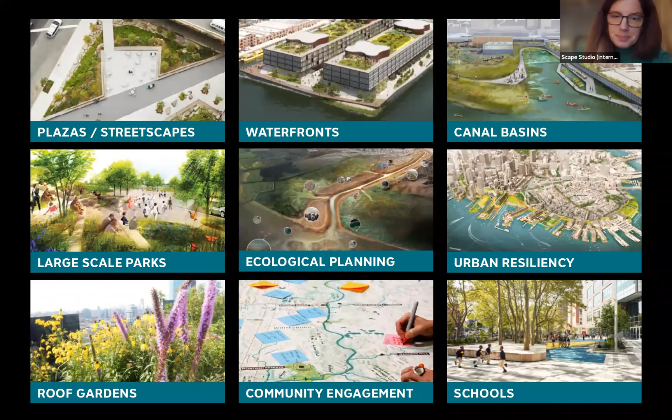At SCAPE, we work and advance a variety of projects at different scales, as I mentioned. We definitely have expertise and strong interest in urban shorelines and waterfront landscapes. We do ecological planning. Community engagement is really core to our practice, and we try to bring elements of it into all of our projects. We also work at the scale of the pocket park, the school, or the plaza, as well as the scale of large scale parks and regional work. So quite a variety of project types.

We bring certain core principles to all of our projects. One is a focus on reviving landscape systems. Nadia mentioned her work in Lexington, Kentucky. These are some images from Lexington looking at a naturally occurring landscape system on the right, these karst pools and emergent moments that interact with limestone bedrock as part of the hydrology of the greater bluegrass region.

On the left is what happens when you try to cover that up and channelize it and turn it into a hidden piece of urban infrastructure: those landscape systems still exist and they emerge sometimes in unfortunate ways, like this overflowing manhole. So a lot of our work is about trying to restore, reveal, and revive landscape systems which have been ignored, improperly designed, or neglected over past generations.

We also think a lot, and I'll talk about this this afternoon, about forging connections between humans and non-humans. On the screen here are two residents of New York City. On the right, a human volunteer dressed up as a horseshoe crab for a festival in Raritan Bay around our Living Breakwaters project, which I'll speak to this afternoon. On the left is another resident of New York City, in Plum Beach. These are horseshoe crabs mating on the shoreline with the new and full moons in the summer months.

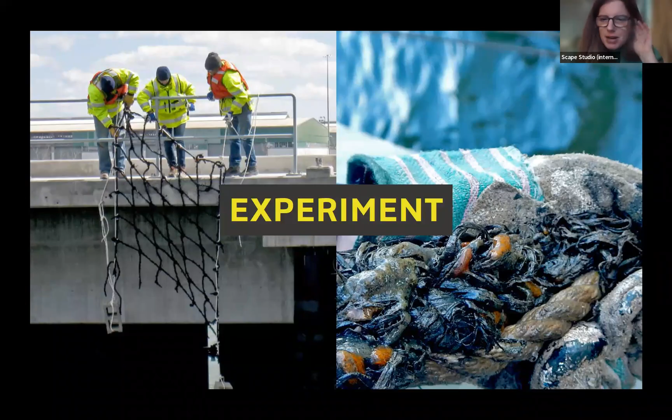Experimentation, I think, is really important for us. We don't always know the results of the landscapes that we're creating. Thinking about working with scientific professionals, in the case of the fuzzy rope weaving evening and the habitat panels you see on the left, we worked with some local scientists at Brooklyn College to study the marine life that grew on these fuzzy rope panels over time. But we pursue projects sometimes simply to learn from them and to apply them to other work, so developing experiments within your larger scale design projects is something we find very important.

So those are some larger framing principles that we bring to all of our projects. I thought this afternoon to talk about urban shorelines and focus on two projects that really relate to climate adaptation and resilient design. These projects are both urban shorelines, but they're quite different.

Urban shorelines are highly contested spaces, often with many different battling and competing interests. For example, horseshoe crab nesting versus beach use versus urbanization are often in conflict with one another. There are also sites that are changing rapidly, either from an urban perspective, like densifying or new development occurring, or from climate change impacts — eroding, suffering from repeat flooding, wave action, or land loss.

And finally, each of these sites has different but unique ecological potential — they have a past ecological history that's been somewhat covered up, which we have tried to reveal or revive within our work.

The two projects I'll feature: one is called Living Breakwaters, a project in Staten Island. At this point it's a very long project — I've been working on it for a very long time, it's been in our office for a very long time, and many different generations of SCAPE have advanced and contributed to this project over its different legacies. The other is a project we've probably had now for 4 or 5 years in the office, work around the Gowanus Canal in Brooklyn with a variety of clients. Both of these are New York City projects, but I do hope that some of the lessons here are applicable to some of your work more internationally.

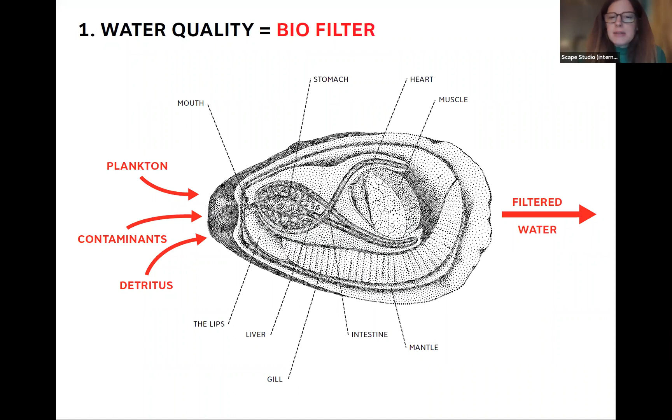This was one of the takeaways from this greater Oyster-tecture research, and it seems like a basic takeaway for this audience, but I think it's important to share that we really need to be thinking about the needs of non-humans in our design of cities. Whether you're a developer building a bulkhead wall, or a parks agency maintaining a shoreline, we should be thinking about operations, maintenance, and design in relation to species that are not just people. This work is about bettering the world for people, but also bettering the world for oysters.

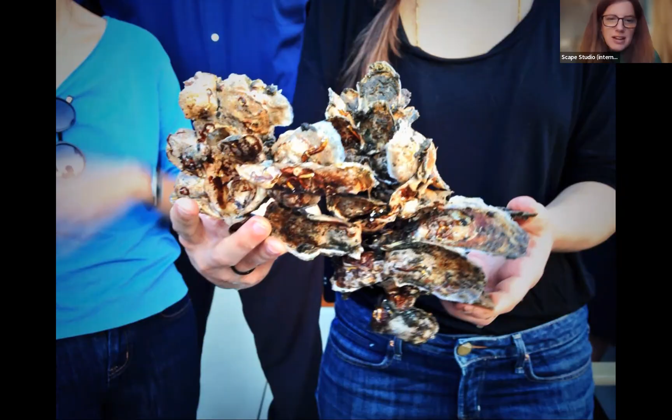This is one of those views of those amazing amalgamated reef structures emerging from this restoration project. To really think about how you design for non-humans, you need to consider the life cycle needs of non-human species.

In this proposal for the Museum of Modern Art, which we titled Oyster-tecture, we did a whole process of mapping out and trying to understand the life cycle of the typical urban oyster. Oysters start as a sperm and an egg, and turn into a fertilized egg for about a 2 or 3 week period. This little oyster larva, called a spat, is free floating within the harbor, and gets pushed around by the waves wherever the currents take it. After that 2 week period, it attaches to something.

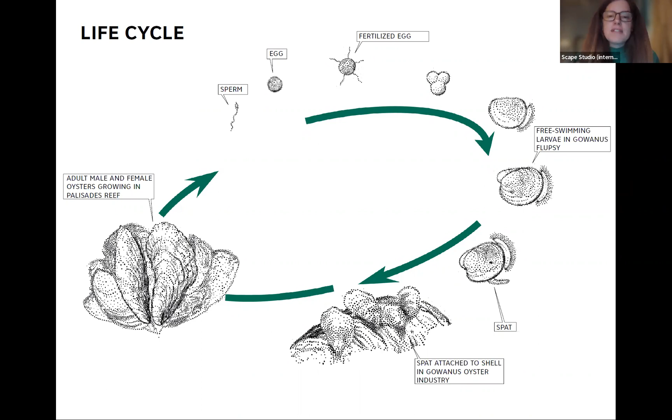Typically it attaches to a material that secretes calcium carbonate—they're slightly attracted to that. They don't have much ability to move themselves, but if pushed by a wave or current into a little eddy or slow moment where there's a material that secretes calcium carbonate, they will attach to those surfaces. Oyster shells are one of those materials. That's why you get these reef structures of oysters building on oysters, because they're slightly attracted to one another. The spat attaches to an existing oyster shell, turns into a baby oyster, and grows over time into this larger scale reef system. That's how the oyster life cycle occurs.

We thought about this in our proposal for the Museum of Modern Art, which was focused around—this was all before Hurricane Sandy hit New York City, this was around 2009. This exhibition was asking different teams of architects and designers to envision how New York City shorelines might react or adapt to future hurricane and storm threats. It was all very hypothetical at that moment.

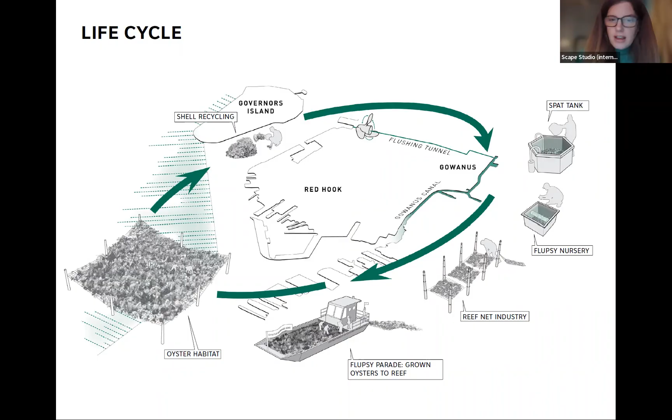We developed this hypothetical proposal that focused on the Bay Ridge Flats, where I showed that original picture of the restoration pilot reef happening—how there could be a whole cycle of restoring, cultivating, growing, and farming oysters within the Gowanus Canal after a cleanup process, then paraded out to this flats area and turned into a very large scale oyster reef that would help protect this neighborhood from storm surge and wave action with future hurricanes.

So this is an image of that kind of seed of an idea in a museum—again, very hypothetical, but it really helped us set up important partnerships with organizations like New York New Jersey Baykeeper, the New York Harbor School, and others, thinking about how this could actually occur, and how experimental science on the ground could inform a larger scale design proposal.

So we made a model thinking about this net-like material being the substrate for the oyster, and how that could be deployed out in the harbor here in the distance as this large scale living reef and blue park—something that could attract people, be an ecological resource, and also help buffer the shoreline.

Sandy happened a couple of years later. So while this was a project, sorry, a couple of these images are very low res—I think something's happening with my screen, but I think it'll be okay.

A lot of the conversations around this project were interesting and curious, but after Hurricane Sandy there was a real renewed interest in pretty innovative thinking around shoreline resilience concepts—not simply trying to build back what had previously existed before the storm, which was devastating and caused loss of life in so many urban shoreline neighborhoods, both from wave action, from surge, and from all the other associated impacts to our energy system, food system, and healthcare system that happened around the storm.

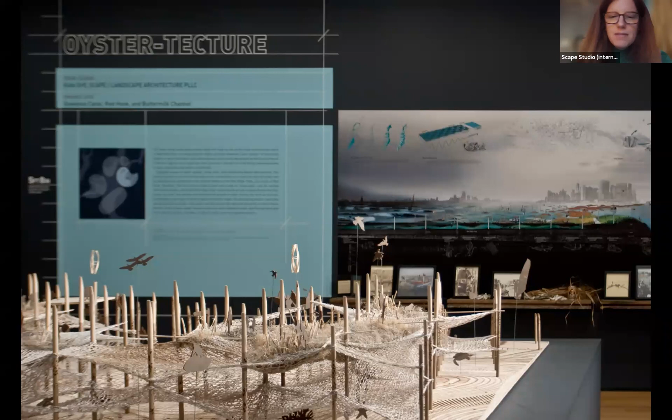Because of the lessons we had learned from Living Breakwaters, from Oyster-tecture, this museum proposal, some of the scientific partnerships and school partnerships we had fostered, and some of the engineering lessons we had learned, we developed this proposal.

It was with a highly collaborative team—many different partners were involved here. And ultimately, the project was awarded funding for implementation.

$60 million of funding was provided by the Governor's Office of Storm Recovery through HUD money. The Governor's Office of Storm Recovery at the state level is the client for this project as it is moved into implementation.

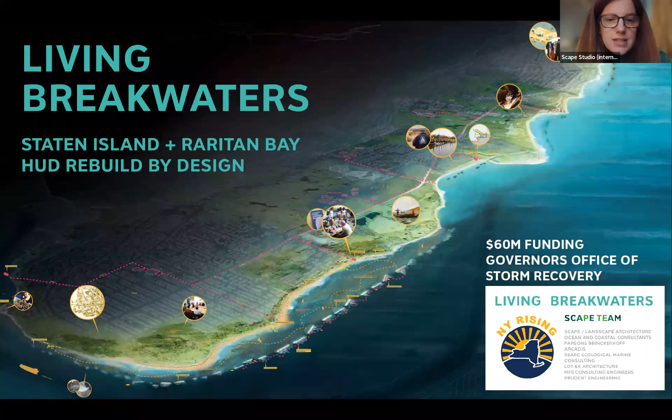But I'll talk a little bit about the genesis of this project and some of the competition work, and then talk about how it's really landed into the world of implementation and construction. Now we're finally in construction on this project, so that's a big accomplishment.

As I mentioned, this project is really about combining typical notions of risk reduction—trying to reduce whether it's surge or wave impacts to the shoreline—with cultural resilience and ecological resilience, and thinking about them all together equally. To start our process of research and site analysis, it was a really innovative competition because it did have a whole research phase.

It wasn't like a typical RFP that kind of tells you what the solution is in the request for proposals. This allowed for an open-ended design process to drive proposals, and I think that's why so many innovative proposals came out of it, versus a kind of repeat of the type of infrastructure that we see in places like New Orleans, levee landscapes.

So we focused in our research on bay landscapes and shallow water landscapes, because we had learned with our work on Living Breakwaters, on Oyster-tecture in the museum exhibition, that we could significantly reduce wave action with elements like oyster reefs where there was shallow water—and in deep water this was much less feasible.

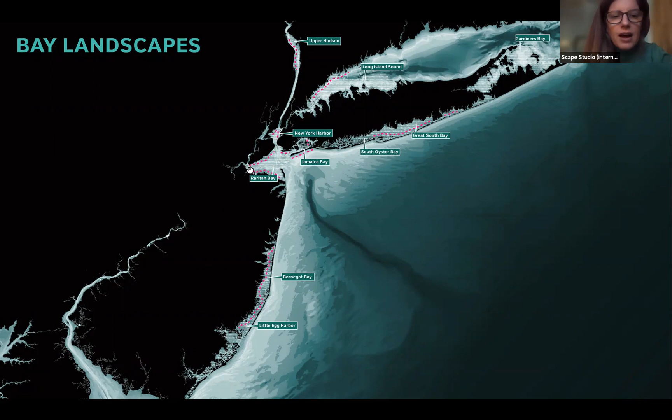Raritan Bay as a site really rose to the top because it experienced this extreme level of wave action that actually increased the height of the surge in that neighborhood and pushed houses off their foundations, and very sadly caused loss of life in that area, and had a very shallow water landscape. This became one of our focus sites of interest, and shallow water landscapes for us are a real mosaic of landscape types.

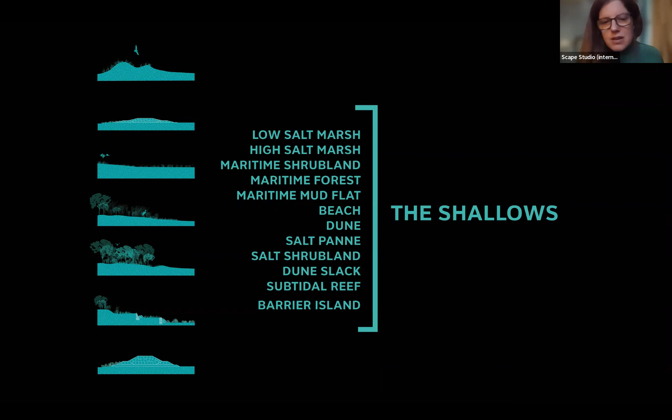So we began to learn more about this cross section of ecosystems that combines to make the shallows, and thought about a proposal for these sites that was not focused around one piece of singular infrastructure, like a levee that cuts off the relationship between land and water, but thought more about a layered approach of tiered wetlands, upland modifications like vertical elevations of building and higher ground development, combined with offshore interventions like marsh restoration, oyster reef creation, or breakwater creation.

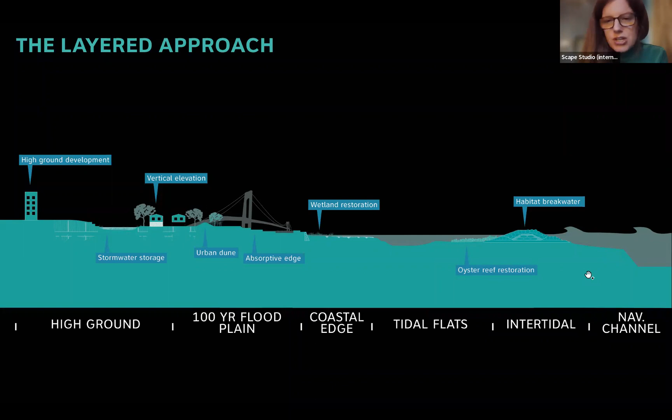That layered, dispersed system enabled more interaction and engagement and a culture of resiliency to develop around the waterfront. People live in many of these waterfront neighborhoods because they love the relationship to the shore, whether it's the view of the open ocean, the beach, or the marsh. These ecosystems are core to people's cultural identities, so we wanted to develop a project that would enhance that rather than cut people off from the water.

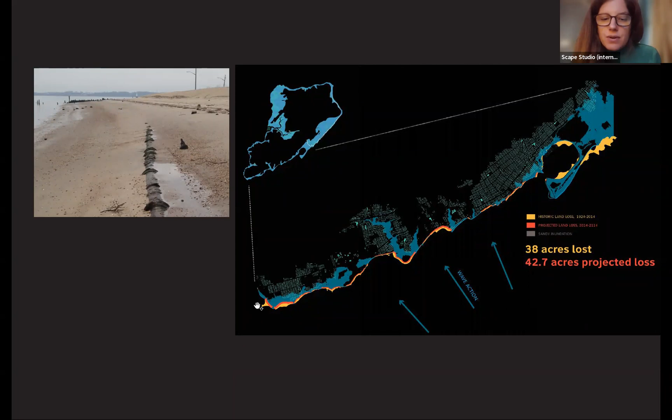We also began to project forward future land loss, which became very important for our calculations—if nothing happened here, what type or scale of erosion in red might we see in the future? This led us to focus on this portion of the shoreline as a site highly susceptible to future land loss over time.

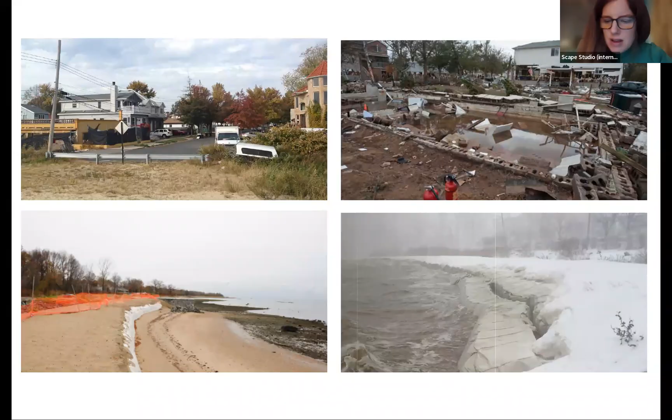So we focused on this infrastructure of breakwaters, a typical risk reduction engineering technique to reduce wave action in this neighborhood. We looked at submergent and emergent breakwaters, below and above the high water mark, and were very interested because it reduces the scale and intensity of the surge, reduces the physical force of the waves, breaks that wave action down, and creates slower, safer water. But it doesn't cut off the water completely—there will still be flooding if you add breakwaters, just less intense and less severe. It maintains that level of ecological interaction and water flow that shorelines need.

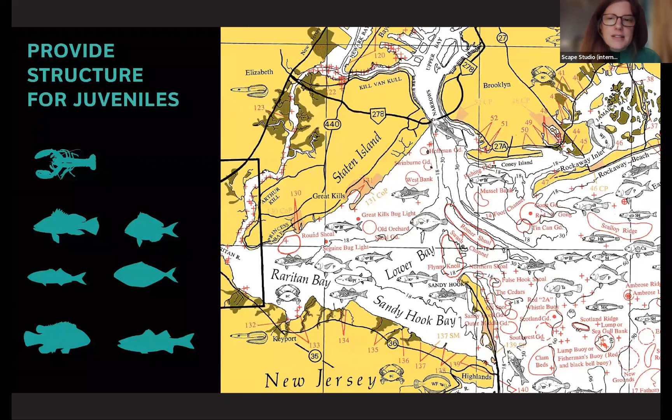One of the things we found with this project was that we had the opportunity within Raritan Bay specifically, because of where it falls regionally within our harbor and river systems, juvenile fish were really using Raritan Bay. Striped bass or tautog or other fish species are good examples of this, but there are many fish species.

Many fish species like structure, and the breakwaters can provide physical structure in the water, like little pores and nooks and crannies. For structure-loving fish, many of them are large as adults, maybe 2 feet, 3 feet, sometimes 4 feet or larger, and they swim up and down the East Coast. They have these huge home ranges, but they often return to their home rivers to spawn.

In this case, they swim up the Hudson and lay their eggs far upstate. Those little baby fish use the Hudson as a nursery for about a year, then move to Raritan Bay, where they hang out for another year or so before they're big enough to become ocean adults and survive the large predators out in the ocean.

This is one of those lessons around not just saying I'm going to design for a fish, but thinking about what types of fish and what phase in the life cycle your site and project can really accommodate. So we began to focus very much on designing for structure-loving juvenile fish within Raritan Bay.

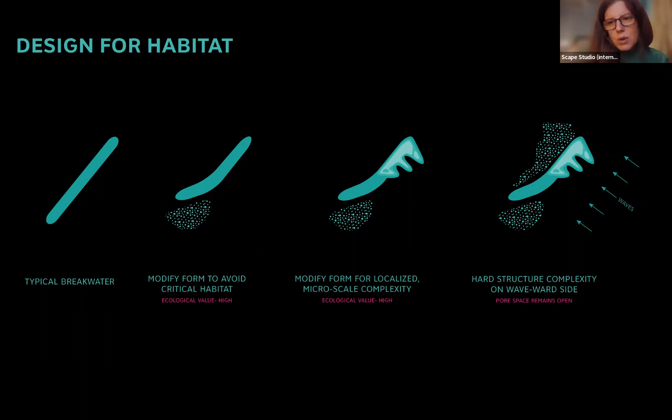That was the effort to create localized, more micro scale complexity. We oriented that complexity on the waveward side, so we're not creating a lot of complexity on the side where sediment is settling out and accumulating, because that fills up all those little holes in the structural diversity. On the waveward side, the waves wash out those holes more frequently, and that structural complexity is preserved.

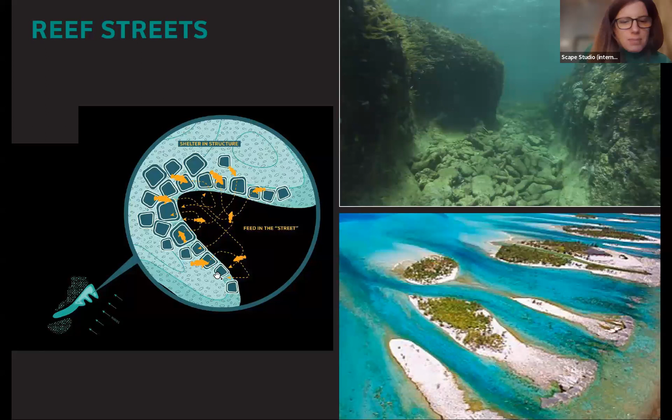These elements, these little fingers that extend, we call reef fingers and reef streets, where small juvenile fish can hide in the breakwater structure in these finger-like protrusions, modeled off of local and international reef systems. They dart out and feed in the open water of the street, then dart back in and find protection and shelter within the reef fingers.

We also worked with ECOncrete to think about alternative types of materials. We're using stone in the breakwaters as a core material, but supplementing it with an ecological underwater concrete that has a chemical and compositional mix better for habitat recruitment underwater. It's also engineered to perform like maritime concrete, a much more robust spec than typical concrete.

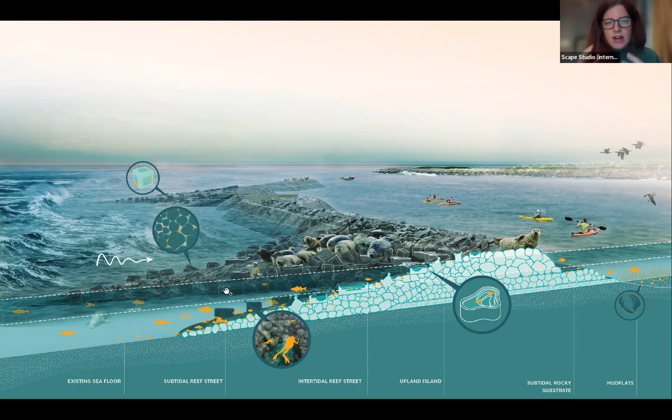Here's that image again of this system all coming together: these more linear breakwaters with emergent tops that can provide habitat for harbor seals, which are returning to New York Harbor, plus underwater reef fingers on the waveward side, incorporating e-concrete tide pools and breakwater units, as well as different scales of stone to create micro complexity below grade.

These were called the Great Beds, and they were actually artificially expanded by oyster farmers over time to be larger than the original oyster reef and cultivated - a whole farming economy happened underwater here. These maps show that evolution, the original tonging or collecting of oysters within the Great Beds, one at Ward Point, one at Round Shoal.

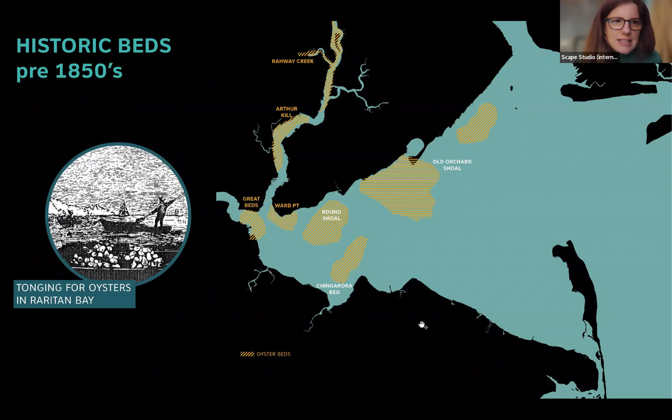It's interesting when you look at the historic navigation channels still in use today - they have this funky little swoop because they were originally designed to avoid the oyster beds. The beds ultimately died, sadly. You can see how that navigation channel emerged in this era and moved around the oyster beds.

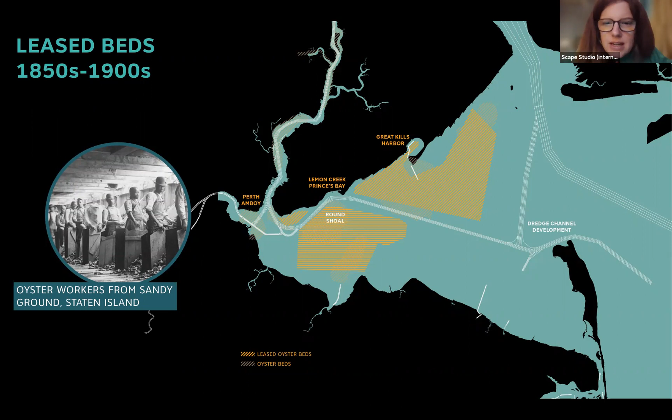But you can also see how these existing oyster beds were artificially expanded as part of oyster leasing. This is an image of oyster workers from Sandy Ground at the height of the oyster economy. But sadly, both the economy around oysters and the natural system of the oyster reefs disappeared around the 1900s-1920s because of dredging, increased sediment in the water which suffocated the oysters, overharvesting, and disease - many combined reasons, mostly tying back to urbanization.

We were inspired by this history. In addition to thinking about the physical structure of the inanimate objects we're inserting into the harbor, like the e-concrete and the stone, we're also trying to foster this living layer of oysters over time on this project. This has been very much in collaboration with a partner called the New York Harbor School, a school system - high school and now middle school - that focuses their entire curriculum around engagement with the harbor.

They have a project called the Billion Oyster Project, which emerged after this competition effort to restore 1 billion oysters to New York Harbor, and they are a very important partner on Living Breakwaters. We worked with them to identify a variety of ways that oysters could be restored back to the breakwaters.

The systems we've incorporated in the construction set include oyster gabions that move around the edges, and different concrete units that have spat on shell and spat on disc inserted into them. They're kind of like starter kits for oyster reefs that will grow and agglomerate over time.

We also need to monitor the oyster beds and the breakwaters with cameras, to ensure that no one is illegally harvesting oysters, because you cannot eat the oysters in New York Harbor—the water quality is not at that level.

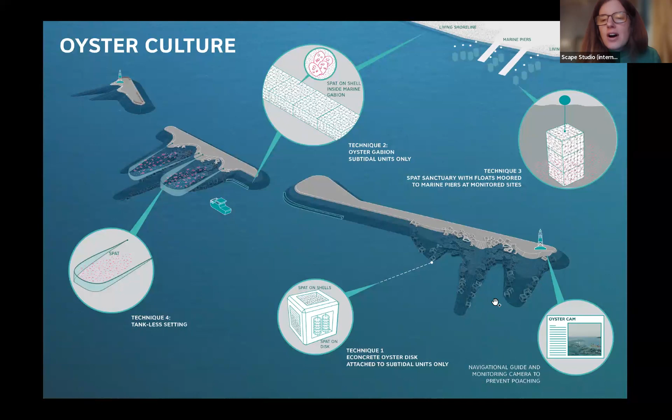I think a part of this is also really about how people are a critical piece of urban ecology. This project is designed to help reduce risk to these coastal communities, but it's also designed to engage people. We thought about engaging the younger generation in this work, and identified a whole range of schools close to the waterfront that could be involved in the creation and stewardship of this project over time.

Our graphic design partners at MTWTF developed an oyster gardening manual for the New York Harbor School that they use to help teachers teach oyster curriculum in their class. We actually had a group of harbor school students come out and work with Staten Island educators to think about how they could bring their schools to the shoreline and engage with this project over time.

This work is all about trying to design to enable positive change. The Living Breakwaters project is not a replica of a natural system that once existed—it's inspired by that, but it's a whole new thing, a whole new type of shoreline infrastructure being proposed. It acknowledges that we can resuscitate some of that historic life that was once here, but it's going to take a whole different form if it's also going to provide this role of coastal protection in this community.

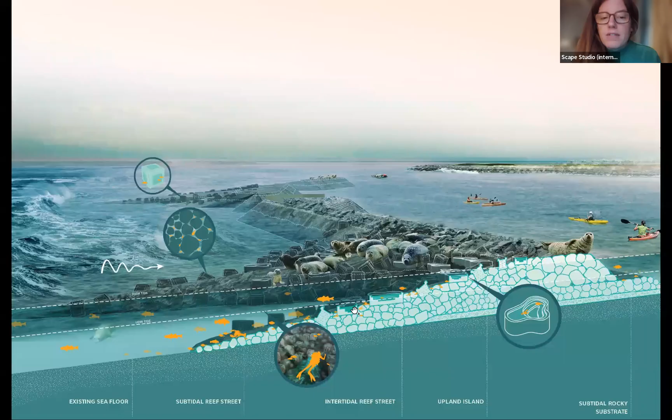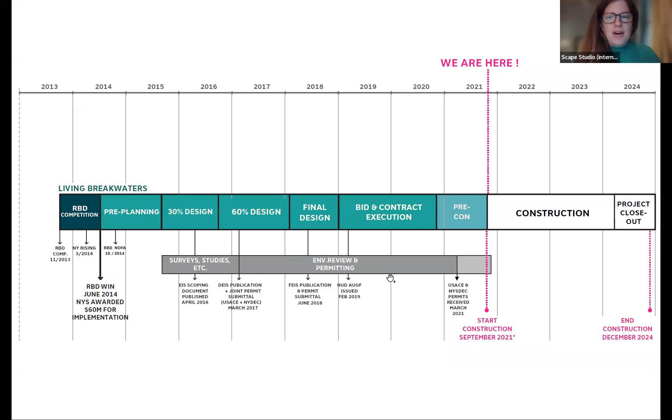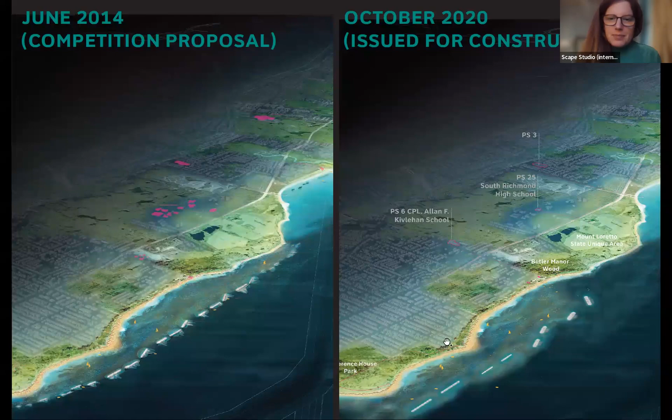I find this slide funny because we have our June 2014 competition proposal bird's eye view here on the left—this necklace of breakwaters that helps create this protected shoreline and enhanced shallow water habitat. And this is the document set from October 2020 issued for construction, the actual configuration of breakwaters that does these things. So in 2014 this was a concept, and in 2020 this is a fully modeled, both physical model and hydrodynamic model, engineered solution. If you squint your eyes they look quite similar, but when you look at the details, they're very different designs. I'll talk briefly about some of the design process of going from the competition design to the reality of what's being constructed.

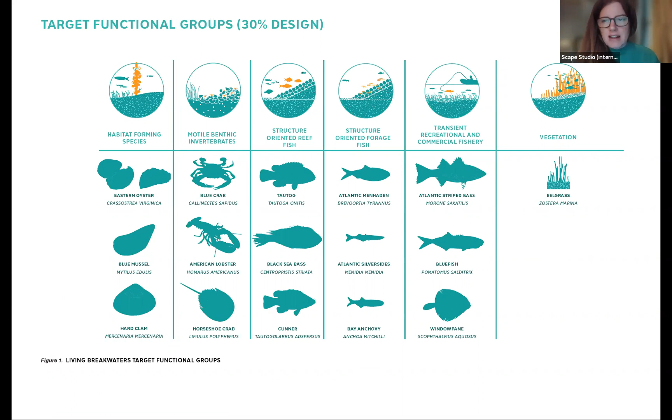We often focus on single species like oysters or juvenile fish to start and catalyze our design process and also get the public excited. But ultimately, we're really thinking about much larger assemblages or ecosystems. This is some of the work we did with the regulatory communities of defining these ecosystems and making sure our project was positively impacting them.

We also had to think very carefully about how our work would be approved and regulated. Some of the regulators, in particular the Department of Environmental Conservation and National Marine Fisheries Services, initially wanted us to provide examples of projects that had done this before locally, so they could say, yes, we agree this will create habitat.

That's one of the challenges when you're working on an innovative project. If there isn't a built example you can point to and say, here's the habitat it created, it can be very difficult to get your work permitted. There's an incentive—it's safer to say no than yes and stick your neck out for innovation.

So what we ultimately ended up doing was working with our marine biologist team to find structures in the water in Raritan Bay, like these little bug lights and navigational bases made of stone that provided some structural complexity. We did an artificial habitat survey of these bug light bases to understand the crevice sizes, the open spaces, and the species recruiting there, to use as proof that introducing this material in the harbor would create habitat.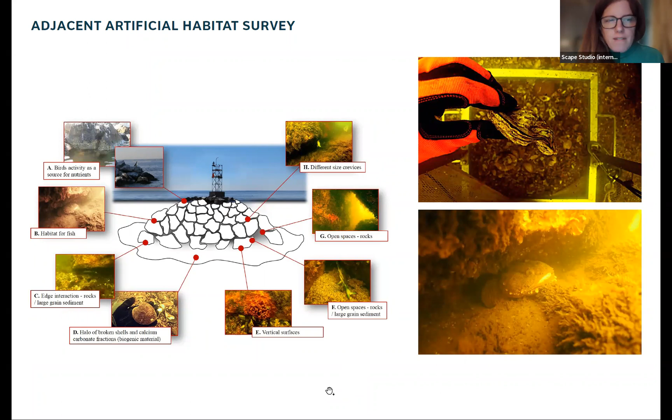So this was just one of those really interesting processes we had to go through—it's not just about design vision, it's about really listening and collaborating with regulators to make sure you're providing the evidence and information they need to feel comfortable with the project.

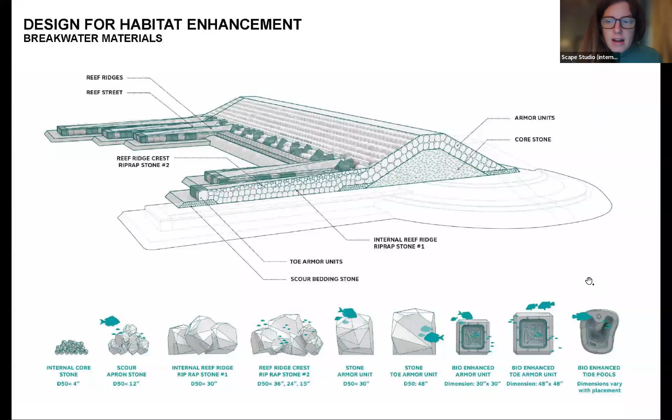These are some of the materials we're using in the breakwater. The design got really refined, streamlined, and value engineered, but it holds these core components: the crest that helps reduce storm level waves, and subtidal reef streets optimized at the right elevations, made of a mix of larger scale stone, bio-enhanced concrete units, and tide pools. These are images of those different elements coming together.

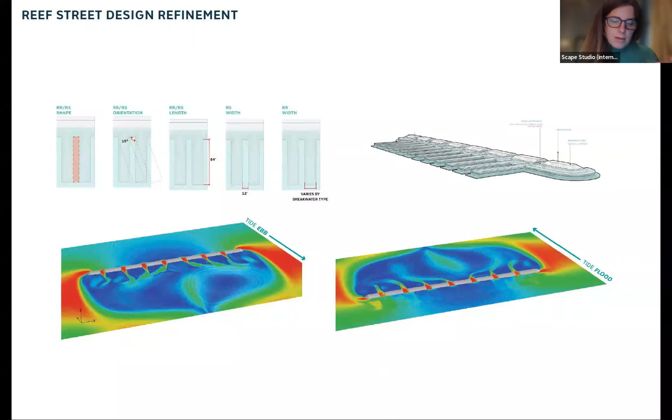A huge amount of hydrodynamic modeling went into proofing and understanding the breakwater, as well as shoreline change and sediment modeling to understand how the breakwaters would impact the shoreline. We didn't want to create a scenario where we were helping build or grow a beach in one area while starving or eroding a beach elsewhere.

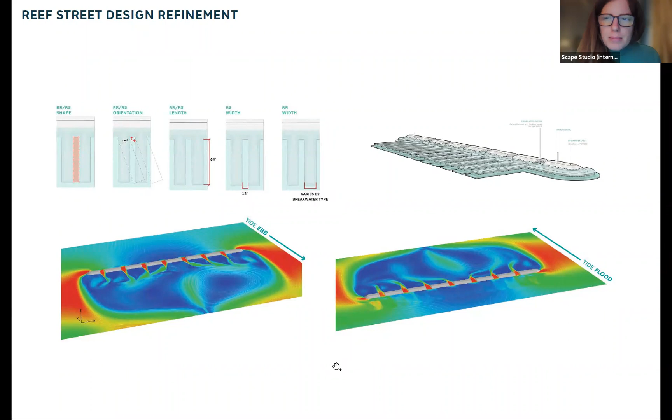I mentioned in the beginning the importance of experimentation, and this is one of my favorite stories about the project. We designed the location of all the ecological concrete units within the project to be a statistically viable monitoring exercise. So we have an experimental ecological layout for all of our e-concrete units.

Some breakwaters have more fish-enhancing units, some have more oyster-enhancing units, and we have a control breakwater with no ecological concrete units whatsoever. We're going to monitor the project over time to see if the reef streets with these different mixes of units do in fact spur habitat for those target species, or if all species use them equally, or if having e-concrete units versus not makes any difference at all.

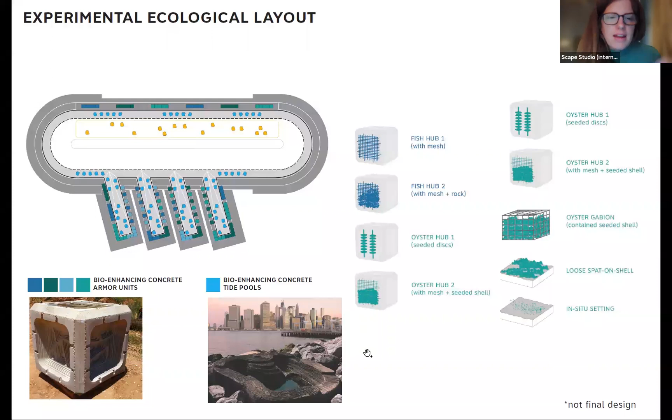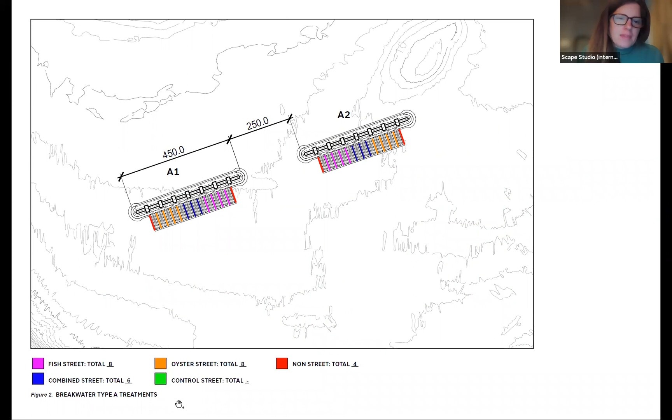So this is one of those experiments built into this large scale structure. You can see here the breakwaters in our plan look like little toothbrushes, but on the bristles of each little toothbrush of the reef streets, you can see some of the different types of experimental ecological layouts that we have.

All of our computational modeling was also proofed with physical models. This is a Canadian facility where we mocked up and modeled the breakwaters, both at the system scale and at the individual breakwater scale. They have different colors on them because each color represents a different stone type or material, concrete type within the water. Every stone and every concrete unit is actually scaled down here, not just for physical scale, but also for its weight.

The waves run through this large tank are scaled down to correlate to the scale of wave with the different storm events the system is anticipated to interact with. The reason all the elements are different colors is that once they run the storm on the breakwater, you don't want to see an orange stone emerge in a blue area. It allows them to understand whether the breakwater is remaining stable and structurally sound.

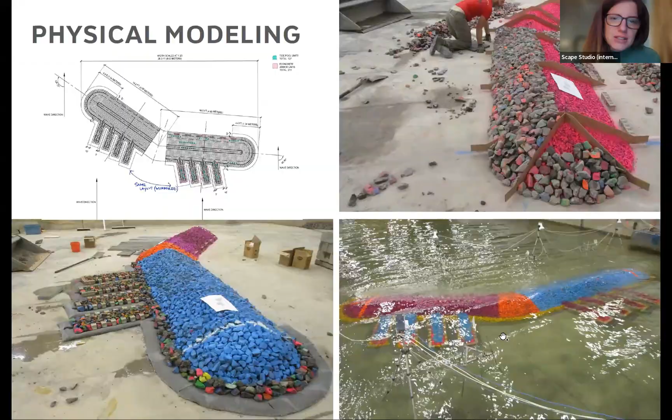And good news, all the colors kind of stayed in the right place, and so the computational modeling was verified by the physical lab. This was just a really fascinating process for our team to be involved in, to see from these different perspectives how the design of the breakwater was analyzed and tested.

At the same time, some of these on-site interventions, like the creation of floating oyster nurseries in local tributaries and work with the New York Harbor School and local Staten Island schools, was all underway from the shoreline side, to think about boosting this social and ecological component of the work.

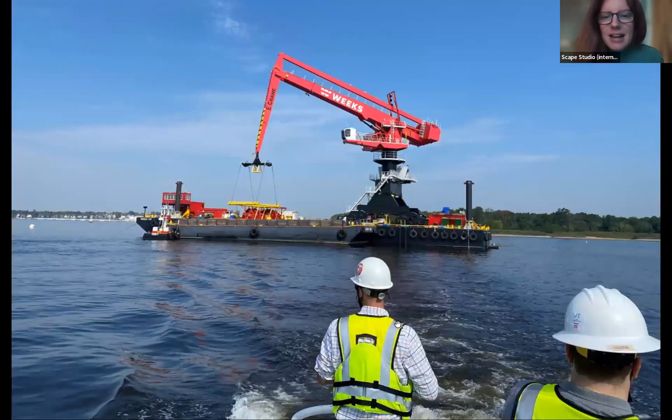So it's really quite wild to have worked on this project for so long and now see it actually hitting the water. It was like a water breaking.

So these are just a couple of quick construction views. This is all underway now. The project has a long construction period because it goes on hold for ecologically sensitive winter flounder mating periods. But these are some images of the ECOncrete units being barged out to the site, some of the rocks being lifted and placed.

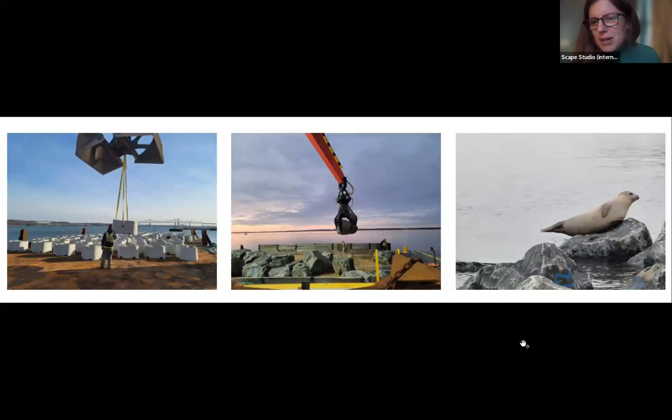One of my favorite pictures, actually just a cell phone shot that one of the engineers took out on the breakwater as it was being laid, shows a harbor seal hauling out on a stone. No one in our office ever expected to see this image, especially so early. It's been a moment of delight that even as the breakwaters are being constructed, they're providing enhanced habitat for even large non-human species, not just fish and oysters.

So that's where that project is and lives. And I've talked for about an hour, so I think I might abbreviate my portion on the Gowanus Canal, but I'll still introduce this project.

I think Living Breakwaters for SCAPE is a really inspirational project. It came through a really innovative project solicitation mechanism, this design competition that was funded for construction, which is like a designer's dream. I would love that to be the case for all of our projects, but it is not the reality of most projects.

Many projects are smaller in scale, don't have the generous funding associated with them, don't have the scale or ambition often associated with them. So I wanted to show how some of this work we've fostered and developed with Living Breakwaters translates to different scales of site, both at the more local community scale, a bit more inland and constrained shorelines, and also at the individual parcel scale.

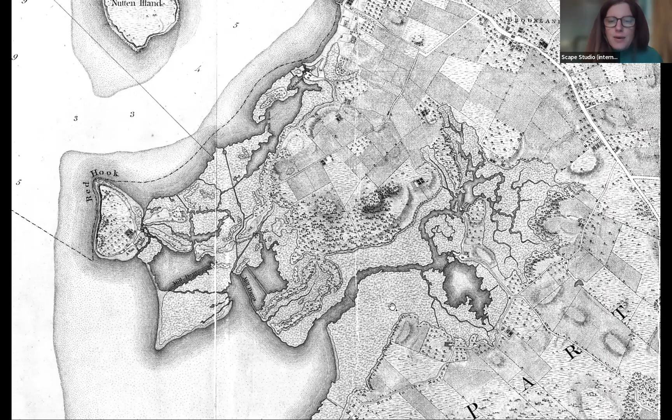We developed this large scale plan called the Gowanus Lowlands for this site in this neighborhood. Much like Living Breakwaters, this area was once a very different kind of condition than today's urban condition. The Gowanus Canal was once a large tidal marsh with lots of meanders and wiggles embedded within it.

It then became a filled-in industrial canal where the edges of that marsh were squished, compressed, and filled in, like in many cities, and turned into a canal about 100 feet wide in certain areas, used as an important port and point of exchange for material transport.

A lot of the brownstone material used to build the brownstones today that are beloved in Brooklyn was actually transported through the Gowanus Canal. Lots of heavy industry happened here—oil and gas plants, manufactured gas plants were here in the top right, wood storage, gravel storage, material shipping, you name it, it was moved along the Gowanus Canal.

And so this neighborhood, like many neighborhoods in Brooklyn, is undergoing change for many reasons. One type of change is climate change. So much of the low-lying pieces of the Gowanus, all of these areas are susceptible to sea level rise and inundation with storms. Sandy flooded all of this low-lying ground around the canal with contaminated water because the water of the canal is not great.

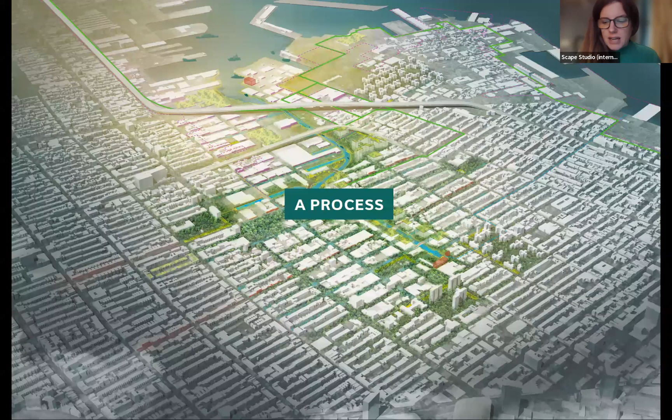And if you're interested in this project, I would reach out to Andrea Parker, who's the executive director of the Gowanus Canal Conservancy. But we helped them set up a process. So the plan is not so much a singular static vision, but it's a process that can evolve over time as the canal changes. And it has these four key points: trying to create a cleaner urban ecosystem in the Gowanus, stronger community connectors through the neighborhoods, thinking about the canal as a network of parks, and also maintaining some of its qualities as a wild urban waterway, even as it is completely reconstructed and rebuilt. So I'll flip through these quickly.

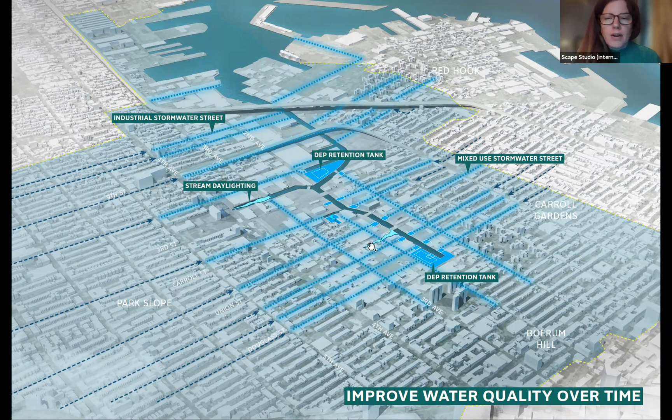But also how the canal can really respond more to the needs of a very diverse and very vibrant community that surrounds it. It's composed of brownstones in Park Slope and Carroll Gardens, public housing projects in Red Hook and Northern Gowanus, artists and creators that live and work in some of the industrial properties today, and also active industrial businesses along the southern part of the canal, which is not being rezoned and will remain more industrial in character. So this is really the combination of community elements coming together.

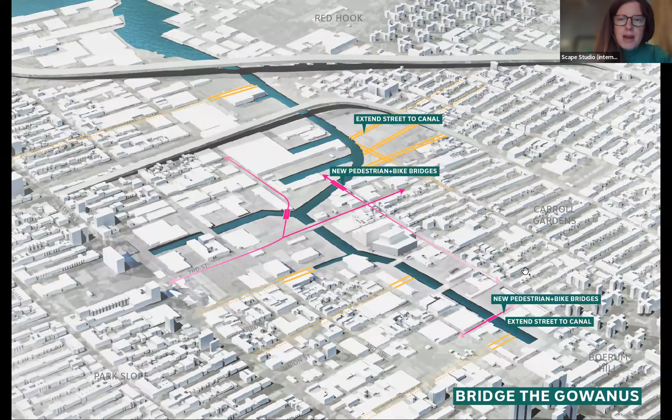So we worked with different community members to define key corridors that could incentivize this Gowanus mix of ground floor activation as part of the rezoning, creating places for artists, industrial fabricators, and community organizations to operate out of, as well as more traditional food and beverage retail. Places where additional community pedestrian connections might be needed to bridge the Gowanus and better connect neighborhoods that have been severed by the creation of the canal. And then really improve the network of parks and productive open spaces that line the canal.

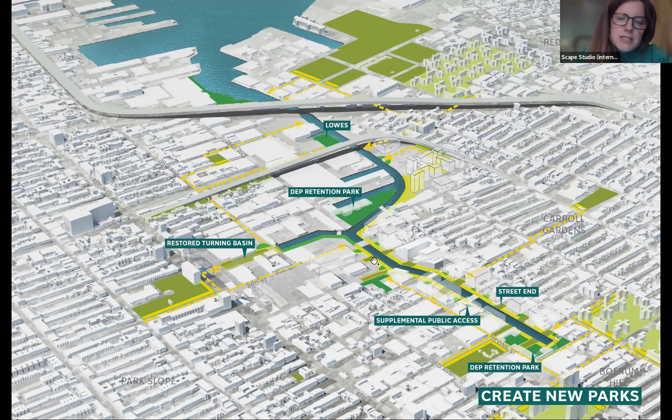But one of the very interesting things about the rezoning process for the Gowanus is that these are deemed to be waterfront sites. So any new building or structure not only needs to be designed to be resilient to future floods and storms, so many of these sites are being lifted, they also need to create a 40-foot setback of shore public walkway or public space along their perimeter. So the canal previously and today is a somewhat privatized environment with very little publicly accessible shoreline. But as the rezoning occurs and as Superfund cleanup happens, many more of these parcel edges are going to be open to public access and designed as linear parks.

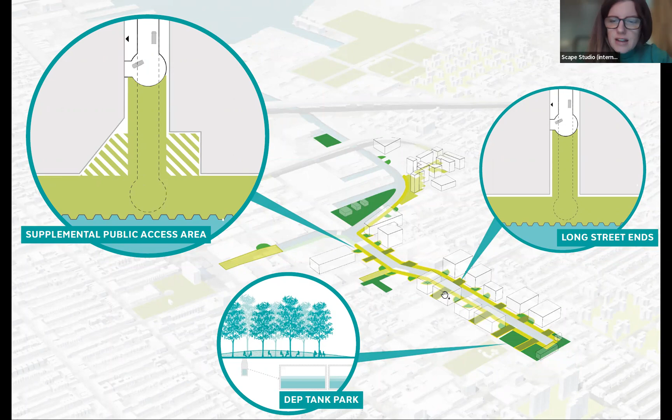And so the Lowlands vision really focused on a lot of very specific zoning language updates that could occur to enhance those public spaces, to not only have them be 40 feet at their width, but where they intersected with streets, they advocated to pull back those vehicular crossings and create kind of micro pocket parks at these different street-end intersections. And also thought about the diversity and character of industrial Gowanus expressing itself within these new park designs.

Because with Superfund cleanup, a lot of these edges are going to be rebuilt as sheet pile bulkheads. The water is going to be dredged and the land behind it rebuilt and redeveloped. So this enormous change is happening. How can some of those qualities and diversity of shoreline experiences - getting down to the water, getting up to have overlooks, actually accessing the water physically, providing points of access - and having a diversity of edge conditions maintain itself within the canal, as opposed to having one long, monotonous bulkhead.

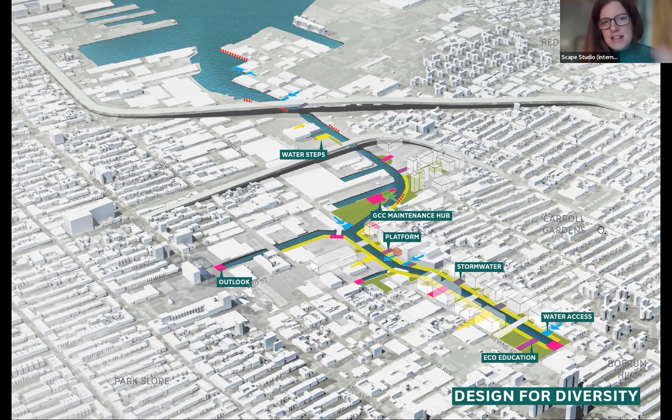Some people kind of compare it to a steel tub, right? Thinking about the canal purely as this steel tub. And so the Conservancy has really been advocating against this, and we created these different drawings that talk about the range of stepped and graded and planted conditions that could emerge, that could help foster this more diverse shoreline edge that still met all the parameters of the Superfund cleanup for environmental health and welfare.

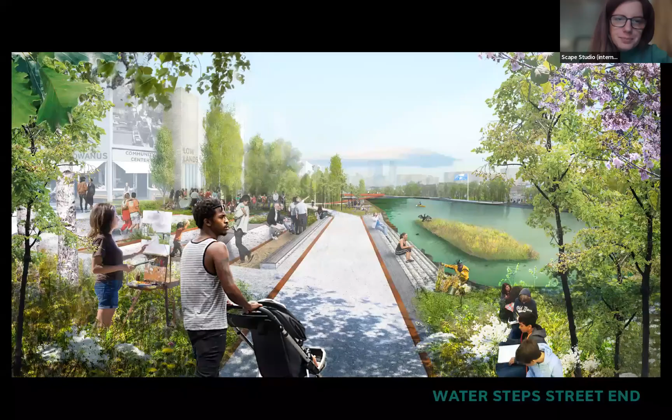And so SCAPE kind of helps stitch this vision together. So some of our public renderings and imagery show how these spaces could emerge and the different community uses they could provide, and the different ecological benefits they could provide.

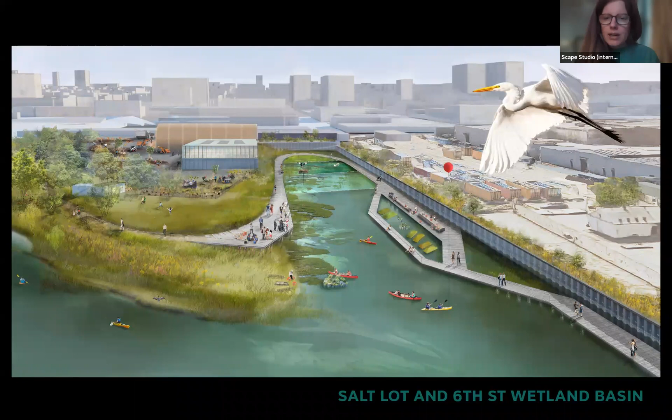But I think, just like with Living Breakwaters, establishing a vision was so important, but it's just really one piece of the equation. Thinking about how all of this builds together and how it's implemented, and also how it's regulated, was a really important next step within the project.

Because these sites, some are privately owned, but particularly at these moments that are street ends, you end up with so many agencies overlapping within these spaces, each with their own requirements. It makes the implementation of an idea like a step down a potentially insurmountable task, just coordinating with all the different parties needed to make this happen.

And so part of the point of this Lowlands vision was not only to provide a framework for what should happen here, but to provide a bit of a roadmap for the different agencies to align their interests, and for the GCC to advocate around, so that there could be a pathway for actually implementing these types of ideas here within the space.

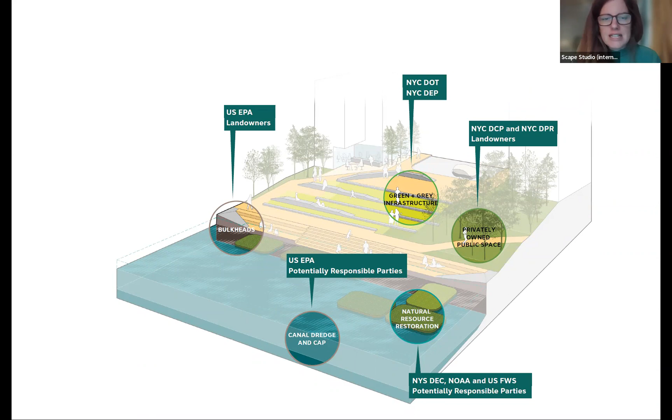This involved an enormous coalition of businesses, elected officials, government parties, landowners, and designers. We did detailed studies looking at how the actual zoning would inform the design of these different spaces, developing ideas for how these shoreline conditions could emerge.

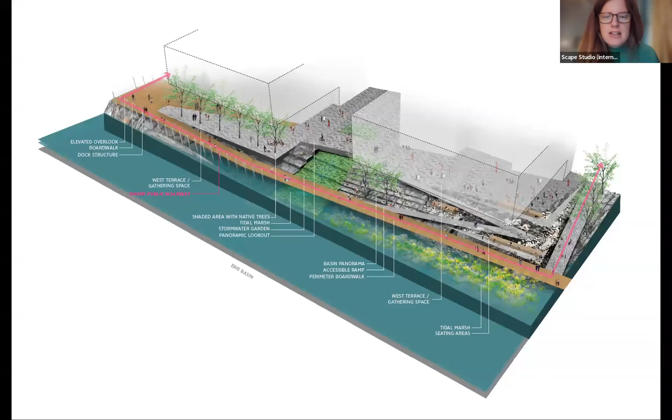But our research found that the zoning code as previously written, and the Superfund regulations, incentivized a sheet pile bulkhead wall set at a very high elevation of 14 foot NAVD 88, the datum we use in New York to think about sea level rise and storm surge in this neighborhood. It wasn't that these ideas weren't possible, it's that this was incentivized by the current zoning. So we had to think experimentally about how to not only put forward a design vision, but also work with the regulatory community to redesign some of the regulations.

I'll skip through some of these so I don't talk for too long today. I'll just talk about this image a bit, where we had proposed this vision, but some of the things it violated according to the zoning code were: edges that could get wet in the future weren't really enabled by the code, and a pathway that wasn't always at the edge, that pulled in and out, was also sometimes in conflict with the zoning code.

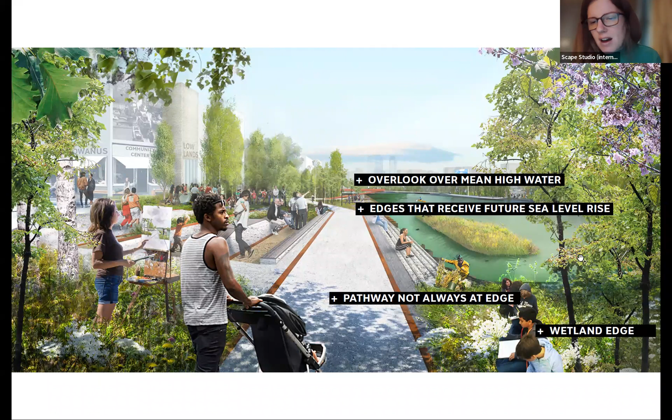All of our concepts around living shorelines, breakwaters, sloped revetments, or constructed islands were also in conflict with some of the zoning code. Not that they weren't allowed, but they weren't incentivized.

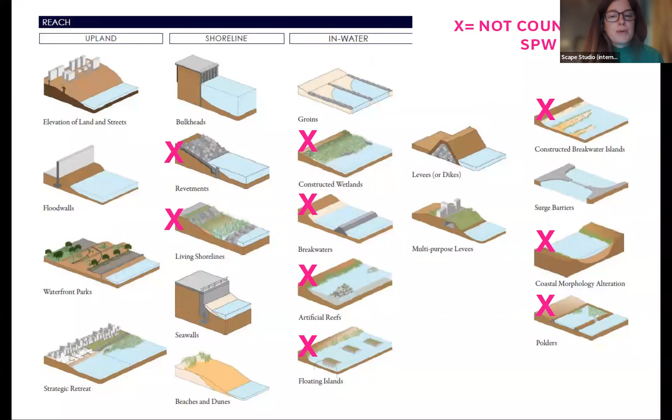So if you were a developer and wanted to build a small constructed wetland at the edge, the previous zoning code wouldn't count that as part of your 40 feet, and would make you find extra space to build it in addition to providing the 40 feet of publicly accessible area. When you provide that alternative to a developer who's very interested in their bottom line, rarely will they choose to pursue that option. They'll choose the bulkhead option, which satisfies the regulation and gives them the most buildable area.

We worked closely with city planning and the Gowanus Canal Conservancy to analyze existing waterfront sites that were built to code but weren't meeting the needs of our coastal species, whether it's the horseshoe crab, juvenile fish, or the mussel and marsh matrix. If you have hard edges and paved sites designed solely for people, they're not necessarily providing these other benefits.

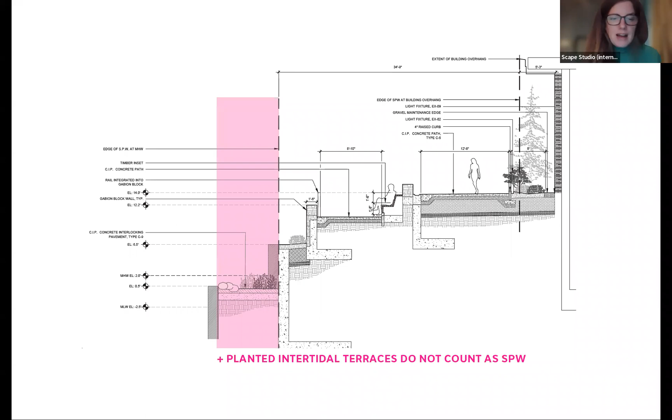We provided interesting cross sections and ideas for how some of these conditions could be added into the urban environment, like ledges, which previously didn't count as part of our shore public walkway, but we advocated that this pink area, though it's inundated by water, should be counted and incentivized through the zoning.

I think a really successful outcome of this work, and this is a slide I'll end on, was that in 2021 and early 2022 the rezoning did pass, including updates to the waterfront zoning regulations for these Gowanus sites, which included creating a community task force to review the design work and hold all parties accountable for meeting the aspirations of the plan. It also involved changes to stormwater management, particularly greater investments in combined sewer overflow controls.

It also included tidal ecosystems and water access as an incentivized and included piece of that 40-foot offset. So those ecosystems, which were once excluded, were now included, and direct access to the water was incentivized within the zoning. This is a big step forward.

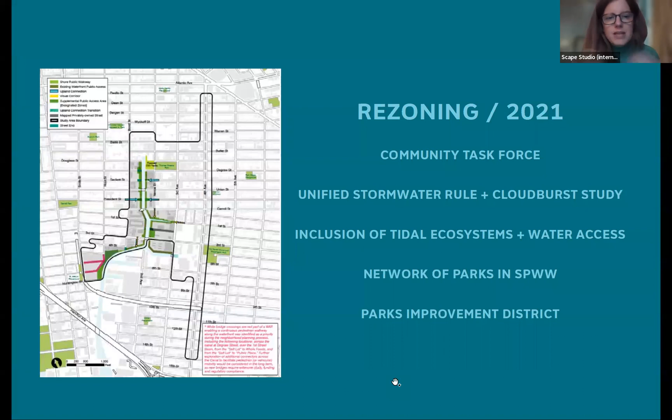It also helped shape and define the physical locations of the network of parks that line the canal, and enabled the potential creation of a larger parks improvement district to help manage this emerging ecology over time. I see this as a huge win for the Gowanus Canal Conservancy, and a translation of how the design work and vision moved through the regulatory system to help enable positive change.

So I think I'll end there. These are just some of the lessons from our work that I extracted from the lecture today, but I hope that was helpful. These are two really different scales, types, and contexts of projects, but they both deal with climate adaptation on urban shorelines, and I hope they're relevant to the work all of you are doing. Thank you so much for your time this afternoon.